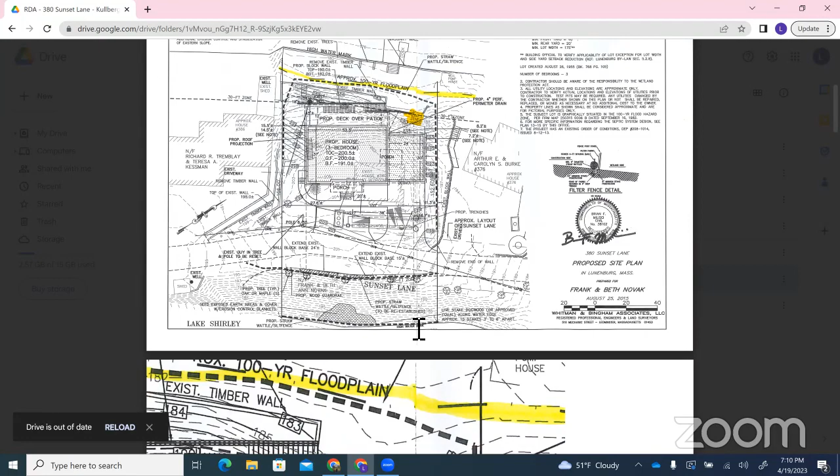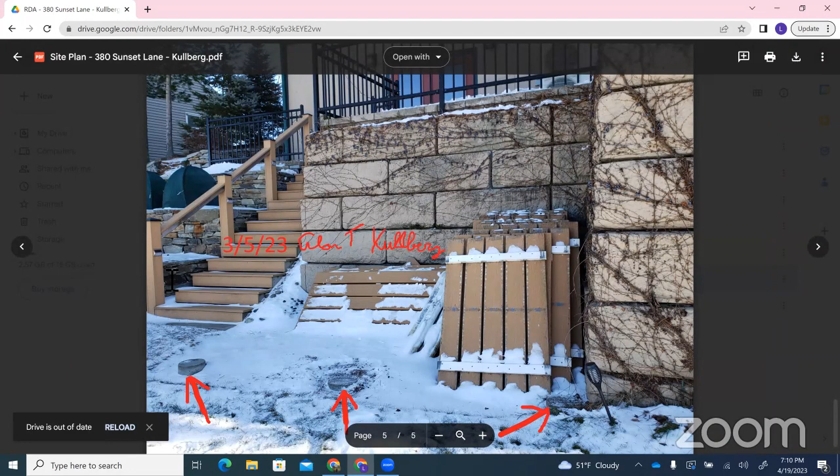And here is with those plans where that shed would be, 6 by 11, and it kind of fits in where that is cut out of the patio. I'm just gonna scroll and show the pictures that were provided. We also have more pictures on the drive that I posted, but this was with the submission. There's the posts that were originally there. And where we visited, the snow's gone, and that's always been mulched and maintained, and the posts are there too. Yeah, those are the existing footings that were there when we moved in.

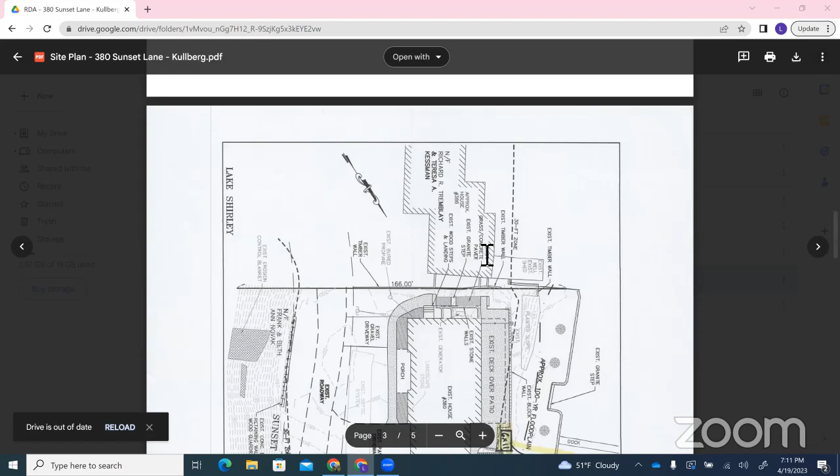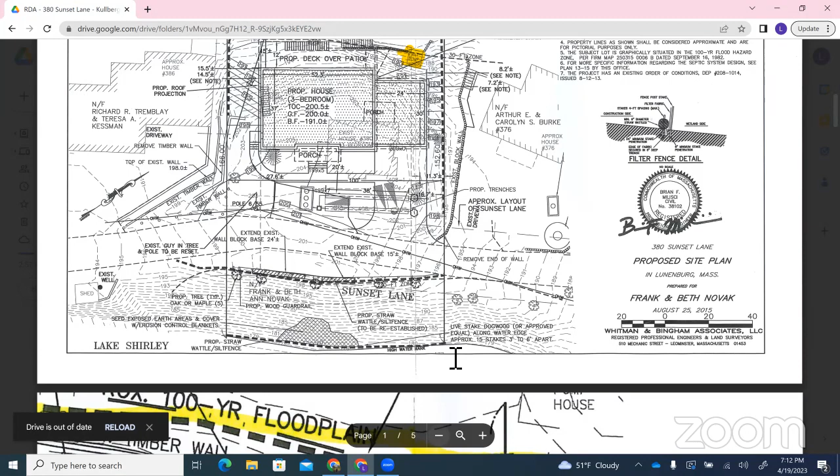So what size was the existing shed, Alan? Yeah, the pump house, I don't have dimensions on it. I never did. There's the size that's shown on this plan. And the only other thing I didn't see was the 50-foot no structure zone, because it looks like at least that shed was over the 30. Yeah, one attachment shows that one corner of the shed would be 23 feet 3 inches from the waterfront, measured by tape measure by me. Okay, the new shed would be? Yes, right there. That shows it there.

So we don't have the 50-foot no structure setback on the plan? Correct, I don't show that. All right, so this whole shed is within the 30-foot and clearly within the 50-foot. Yes. Okay, thank you. Anything else, Rich? No, I'm good for now. All right, any other comments or questions from commissioners? Any comments or questions from members of the public?

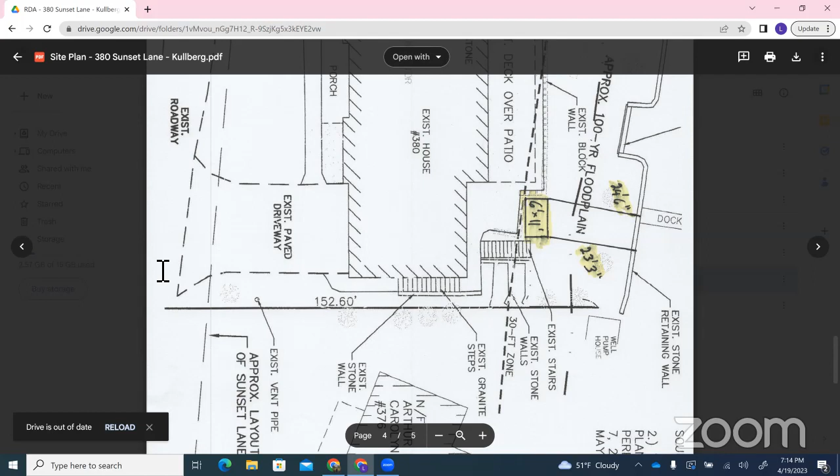Mr. Chairman, can you hear me? I can. I'm very familiar with this project. I've lived in Lake Shirley for about 36 years, and I'm speaking as an abutter now because it is my neighbor. I just want to say that I fully endorse the project. I understand what it's all about, and I think it's a real good idea. Good for the lake and good for them as well. Okay. Thank you.

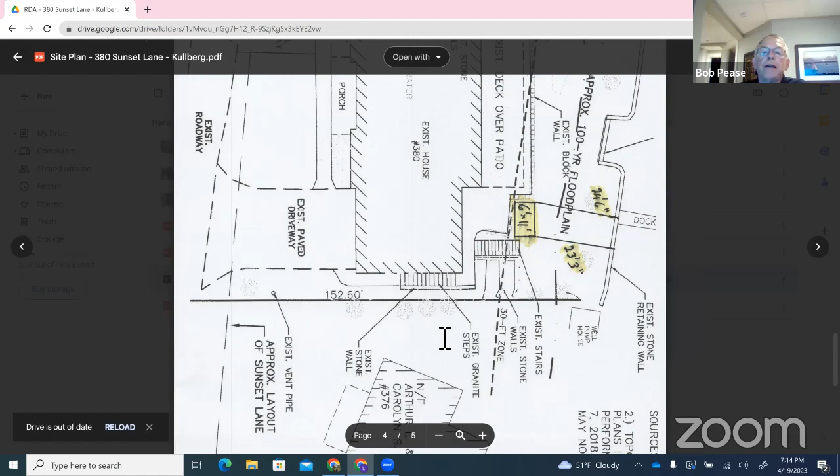I'm looking at the diagram here, and it shows it's 6 feet by 11 feet. And Anna showed a picture before of what looked like maybe the tops of some sonotube footings. Oh yeah, right there. I see. There's 3 of them. And is the dimension across those 3 footings 11 feet?

There's 3 more footings. Yes, the dimension across the front of those is approximately 11 feet. And then there's 3 more footings along the back wall there, like where my signature is on that wall. But I took those pictures in the winter, and so I couldn't get to those.

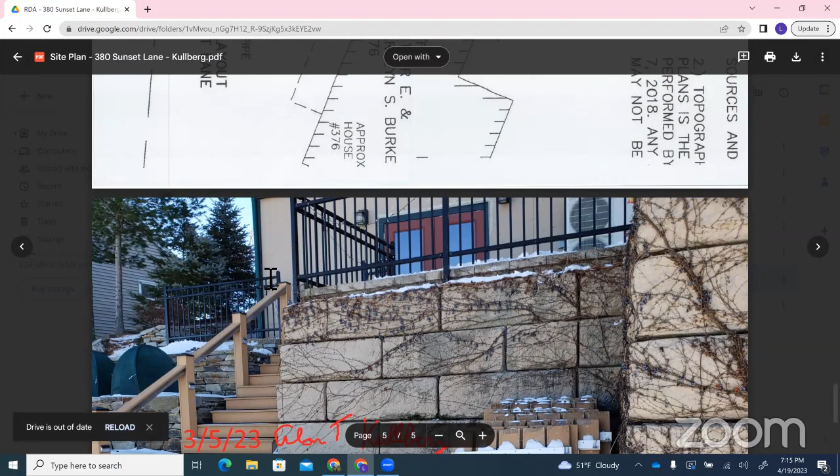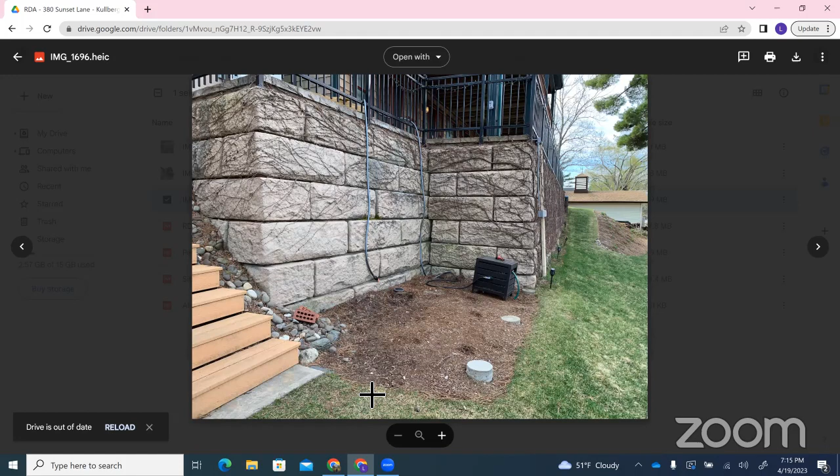But when Anna and Mary Wilson visited last Saturday, they could see 2 of the other footings. One of the footings is buried under some stones right there, right next to the stairs. So I've not dug that out, but it is under there. And so, Alan, in your opinion, or to your knowledge, is the distance from the front footing to the back footing about 6 feet? Or a little more? Yeah, I think it's slightly more, because I want to have a little gap between the wall and the back of the shed for air flow.

I see. All right, well, to me, that's great. The existence of the footings is good evidence of a pre-existing shed there. Because, in my opinion, without the pre-existing shed, this application would be dead in the water. But that's just my opinion as one member. Thank you very much. Any other comments or questions from commissioners?

Mr. Chairman, this is Mary. Yes, go ahead, Mary. If I may. So these footings look relatively, new is not the right word, because I don't believe that the current residents put them in, but they don't look like they've been used. And the arrangement of these footings doesn't align with the former pump house position, I don't believe, from my read on the engineered drawings. As an engineer, my read on those engineered drawings.

So Mary, as a person who did the site visit, what's your interpretation of these footings? They look like they were placed there by a former owner of the property in anticipation of putting a shed there that maybe never materialized. That's what it looks like. And from the measurements of where these footings exist now versus where the drawing shows the former pump house being positioned? Yeah, that seems to align with what the drawings say as well. Okay, all right, thank you, Mary, for that clarification and for setting me straight on what these footings represent.

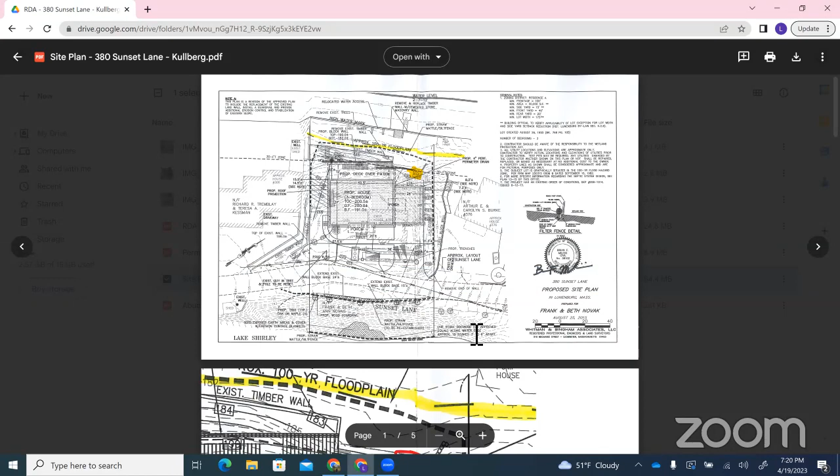Mr. Chair? Actually, I think it was on the other side of the 30-foot, Bob. I don't think it was on the lake side of the 30-foot. That's my interpretation, looking from plan to plan, of the drawing as well. All right. I should keep my mouth shut. I can't say anything right tonight.

Yeah, so, Mr. Chair, this is Alan. Yep, go ahead. Hi, yeah, so by this drawing here, you can see the existing pump house there that's highlighted in yellow. That's a little closer than the corner where we want to put in the shed.

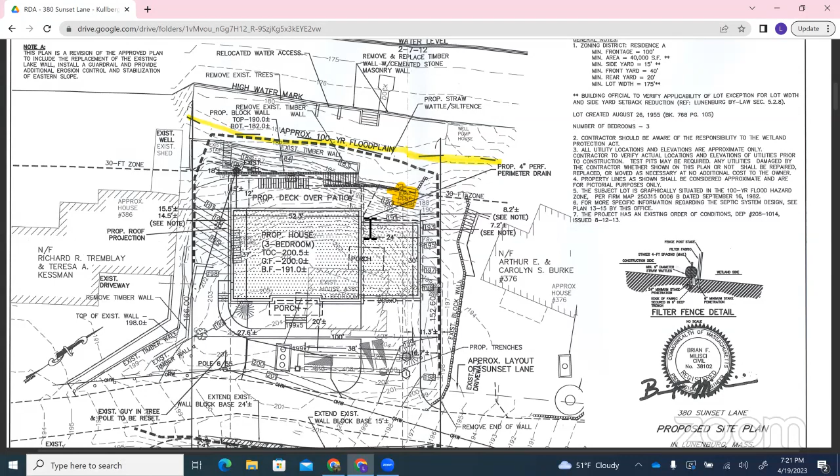But it also looks like it's a good deal smaller than, if that's a scale drawing. Yeah, although maybe that's not a scale drawing. 24 by 30. So if that's 24 across, well, it certainly is an 11. Yeah, I think you are correct that pump house is a little smaller than the shed we're proposing.

All right. So, right now we have a motion on the floor looking for a second. Do we have a second? If we have no second, then I'm gonna be looking for a different motion. We have to do something with this application. I'll second Rich's motion. This is Mary. All right, thank you, Mary. So we have a motion. Do we have further discussion now?

Obviously, there's a lot of angst about this, just given the waiting time here and the amount of silence. Is there further discussion about the motion to give a positive determination, which would mean that the shed couldn't be built? And I'm assuming, although he didn't say it, that Rich Tremblay will be recusing himself since he said he was speaking as an abutter. Yes, sir, I will be. All right, thank you. So that means it needs 3 votes to pass.

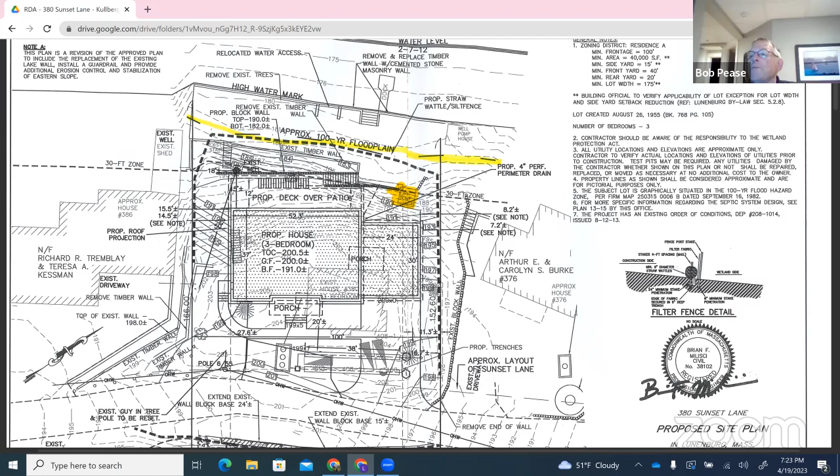On to our next public hearing. Pursuant to Mass General Law, Chapter 131, Section 40 as amended, and the Town of Lunenburg Wetlands Protection Municipal Bylaws, a public hearing on a notice of intent by Lunenburg Skate Park for the proposed construction of a skate park and drainage basin at 100 Chestnut Street. I see Greg Roy warming up his screen.

Can you all hear me? I can hear you just fine. Greg, am I right that there's still no DEP number? Correct. I just looked a few minutes ago. There is no DEP number, so I will give you an introduction here.

I'm hailing from the Outer Banks of North Carolina this evening. Congratulations, that's wonderful. That's exciting. I hope that my connection here stays solid. So the weather is indeed beautiful here. Excellent. Mr. Chair, could I share my screen? Would that be acceptable? Absolutely. Okay. Bear with me here. I'm running with one small monitor. Okay. Can you all see the screen? I can. Yep. Okay, great.

For the record, my name is Greg Roy with Dillis & Roy Civil Design Group, and I'm representing the Lunenburg Skate Park, Inc. this evening. With me today on the call, I think, is Anthony Caiozzo, who many of you probably know, he's the president of the Lunenburg Skate Park group. And I just wanted to spend about 5 minutes giving the commission a little bit of history as to where we've come with this project, and then I'll of course do the customary project introduction.

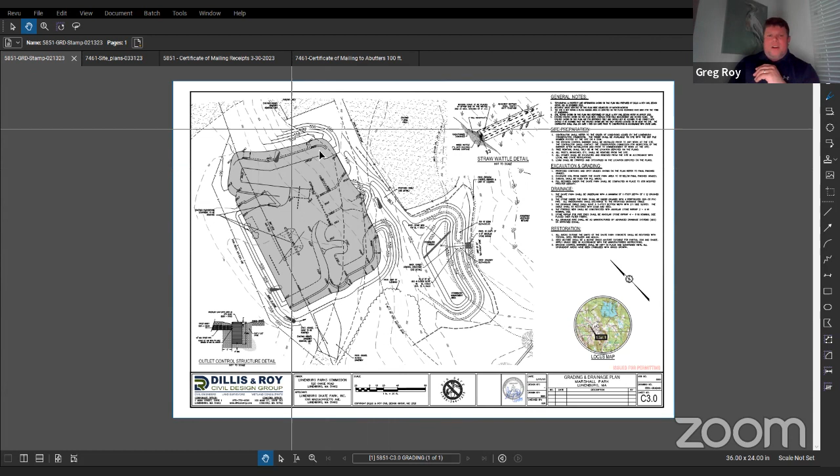So if you can see my cursor here, this line right here is the limit of the T-ball fence. Off the page, up in this area here, is the parking area, and then further up it would be the outfield fence of the softball field, just to give everybody a bearing. And I hope that puts context in this, because I'm realizing now I don't have an overall park plan to share with you.

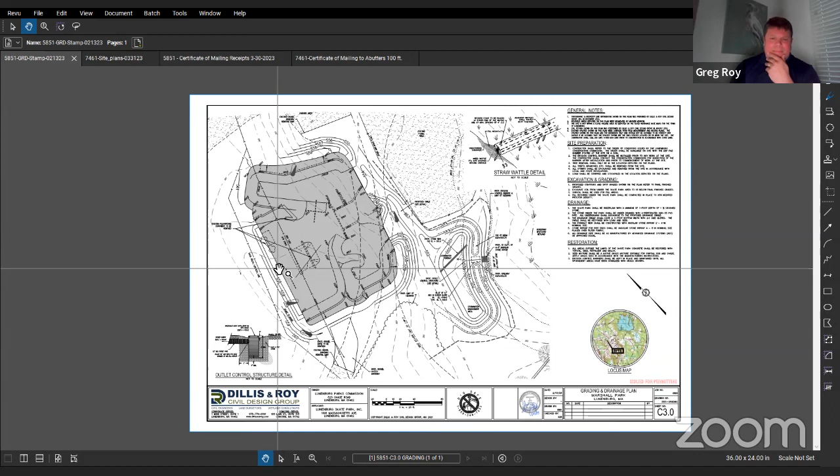But the solid gray hatched area is the limits of the concrete skate park that we would be constructing. The footprint of that is 8,500 square feet. And I think the overall dimensions are approximately, I can't even remember, I think it's 75 feet by 120 feet or something nominally like that, to put that in perspective for you.

There is a wetland system down in the woods, which you can see here with these wetland flags. It's not hatched in, but it's right down in this area here. And so there's an associated 30-foot no-touch zone, which is right at this dotted line here, right on the edge of our proposed limit of work. The corresponding 50-foot no-build zone is this dashed line here. And then the 100-foot buffer zone is this heavier dashed line. So most of the park, with the exception of a very small corner of it, is completely outside of the buffer zone.

This project, of course, will be creating new impervious area, and is not a residential project that would be afforded an exemption under the Massachusetts Wetland Protection Act from the Stormwater Management Guidelines. So we have designed a stormwater management area to comply with the Massachusetts stormwater management policies. We have designed a swale system here between the skate park and the T-ball field that will collect the runoff from the skate park.

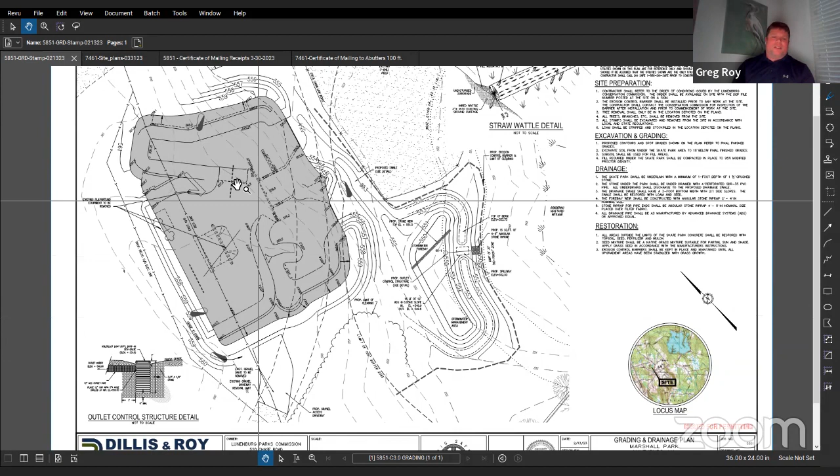From a grading standpoint, it's very difficult for you to see on this two-dimensional plan, but if you can all imagine a skate park, it has ramps. So this feature in here is a sort of ramp where this section is about 4 feet lower than the upper portions here. And this slopes down towards an open end on this side.

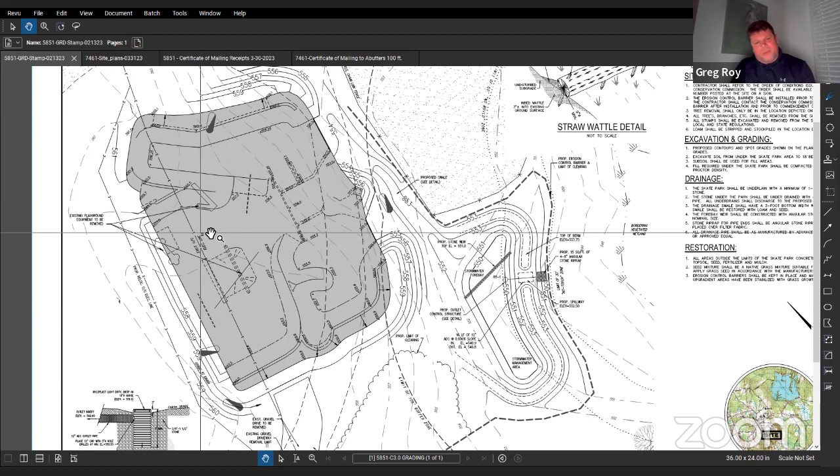Same thing here. We have some flat areas, but they all slope down, and everything ultimately drains from this high point on the left side of the plan down to the right towards the T-ball field. And we designed it that way intentionally because that's where the existing grades work on the site, and it made the drainage work in the skate park, so that we don't have any standing water anywhere in the skate park. Very important.

I did not get them on this plan. I know that I'm going to owe you this. I did send a survey crew out after we submitted this, after my site walk with Anna, which was about a week and a half ago, I think, or 2 weeks ago. We did locate the trees within the stormwater area, particularly the trees that are within the 50-foot no touch zone.

Between 30 and 50 feet, there are 4 trees that will need to be removed. If my memory serves me correctly, there's 1 pine and 3 hardwoods. I think they're oaks. All of the oak trees in that area are in the 12-inch range. So we're not talking about enormous trees, but there are a few trees there. I know that you can't close the meeting this evening because we don't have a DEP number, but next time I do intend to have those on a plan with some mitigation for those as well. So I did want to bring that to your attention.

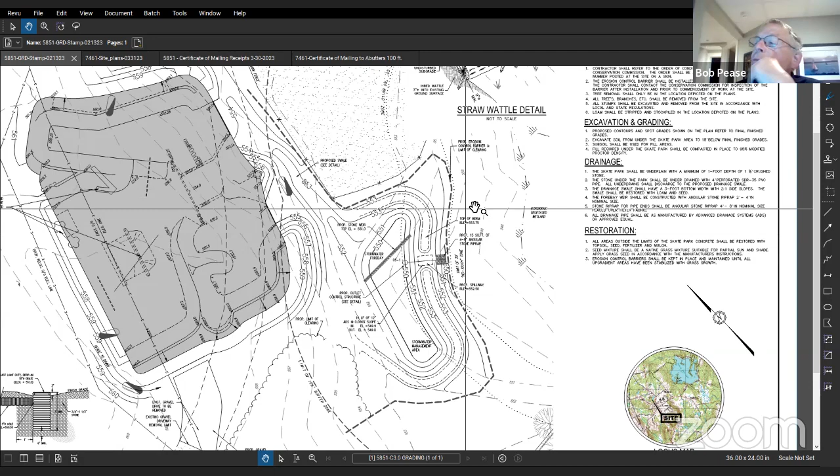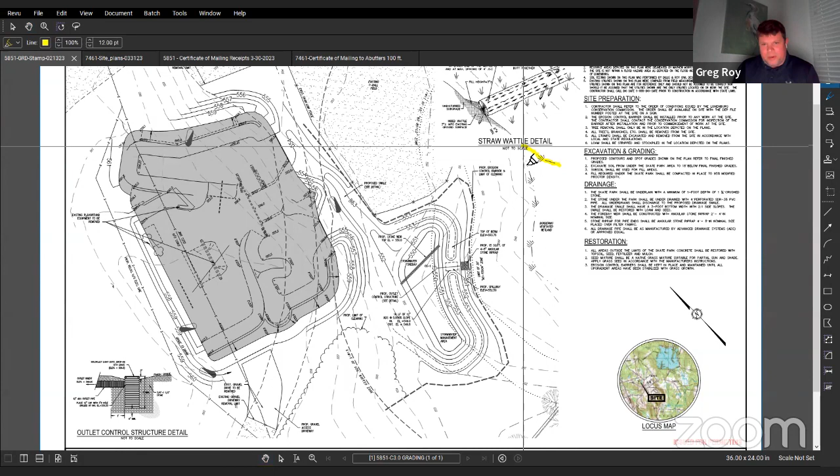Mr. Chairman, if I have a question. Go on ahead. I may have lost track, Greg, and I apologize if I did, but somewhere in the woods there appears to be a wetland. This weekend when Anna and I went out, there was a depression and it was filled with water. Yeah. Oh, and it's where your cursor is. I see that. Let me highlight it for you. Sorry about that. I ordinarily would mark up a plan, but this is the wet area down here. Okay. Very good. Thank you. Yep.

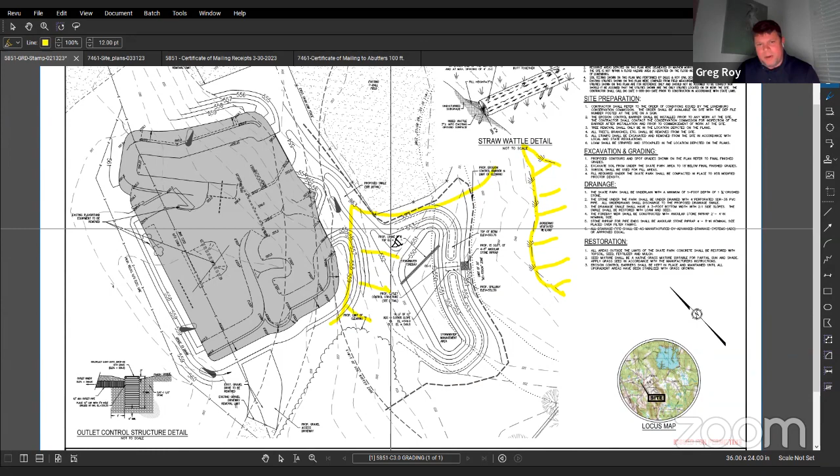And Greg, could you highlight the area where you're saying you're going to take down trees? Yeah, sure. So there are trees, and I'm going to show them to you within the 100-foot buffer zone. I'm going to circle this. The whole area is wooded, really. All in here is wooded, okay? I'm going to show you all the trees within this location on an updated plan, but the 4 trees that are within the 50 are located right in this area here.

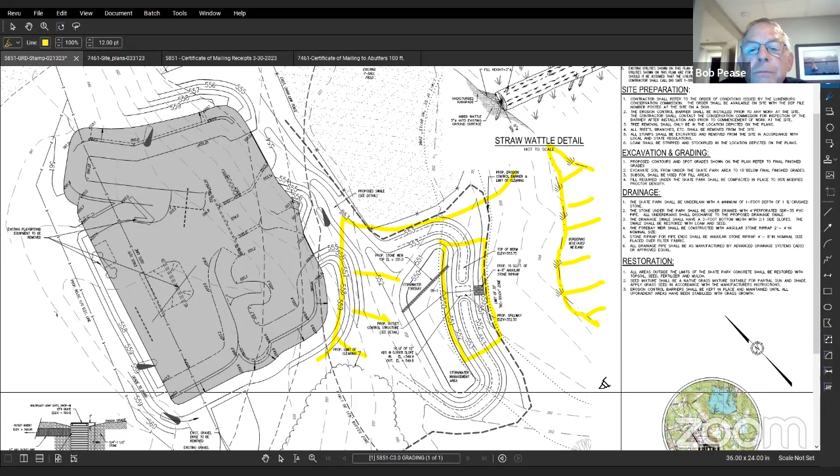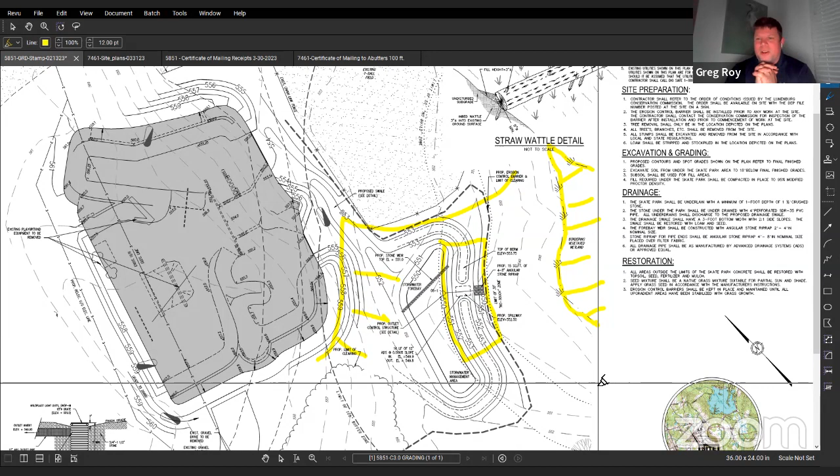Speaking as one member of the commission, our present rules say you need to replicate trees taken down within the 30-foot no disturb. It doesn't talk about the 50. Okay. We would love not to do any replication. We're obviously trying to devote as many dollars as we can to the construction of the park, but we certainly understand that we have to comply with your regs. So I guess I was under the impression that it was within the 50 foot. No, it may be within the 30. Okay, well, we're not doing any trees within the 30. No touch within the 30, so we're in good shape there. Other questions or comments from members of the commission?

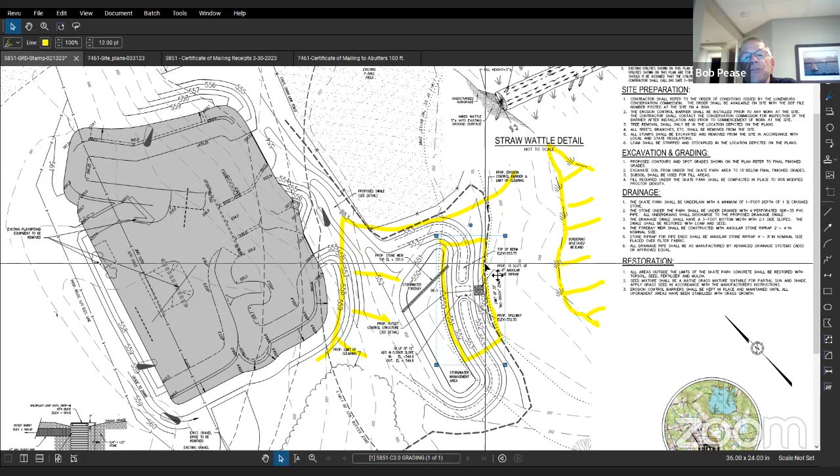Mr. Chairman, if I may. Go right ahead, Mary. I'm sorry if I interrupted you before. I thought the replication was a mandate within the 30, but was discretionary outside of the 30 within the 100. We can ask for replication anywhere, I believe. But there's nothing in our regulations that talks about replication outside of the 30. Fair enough. That's my interpretation. Richard was the author of that, if he wants to weigh in here, by all means, but that's my understanding.

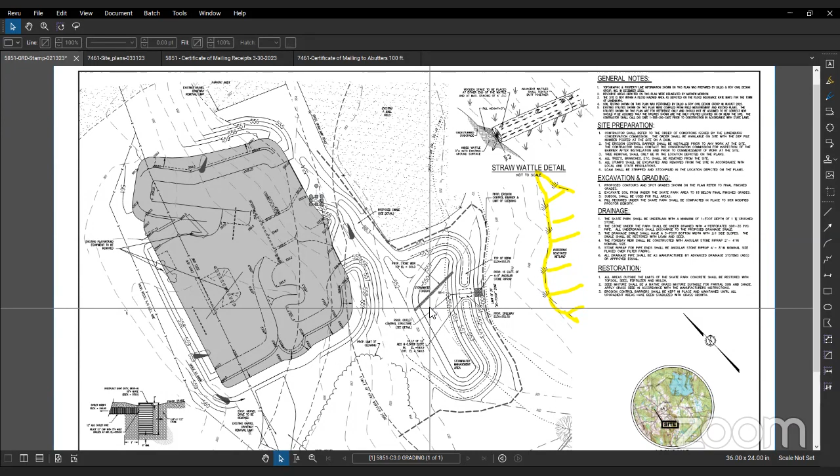Yeah, the regulations are under the bylaw, and 30 foot is a mandate. Anything outside of the 30 foot is at our discretion, as we feel that it should be replicated if need be. Thank you, Mr. Chairman. Thank you, Rich. Other comments or questions from members of the commission? Richard?

Thank you, Mr. Chairman. Greg, how many trees in all do you estimate that you'll be taking down in that area? Boy, it'd be a guess at this point, Richard, but I think it's probably in the 15 range. I have them on a plan. Let me see if this works. 1 second. I hesitate doing this only because I'm not sure how it'll show, but let me see if this will work. Bear with me. So you can see here, we located a ton of them.

I'm still looking at the same screen, Greg. Oh, can you see the screen that has all the trees on it now? Nope, we're still looking at the same plan that we've been looking at for the last 15 minutes. Oh, okay. 1 second, then I have to switch. I am not used to sharing with only one monitor. How about now? Can you see a plan now?

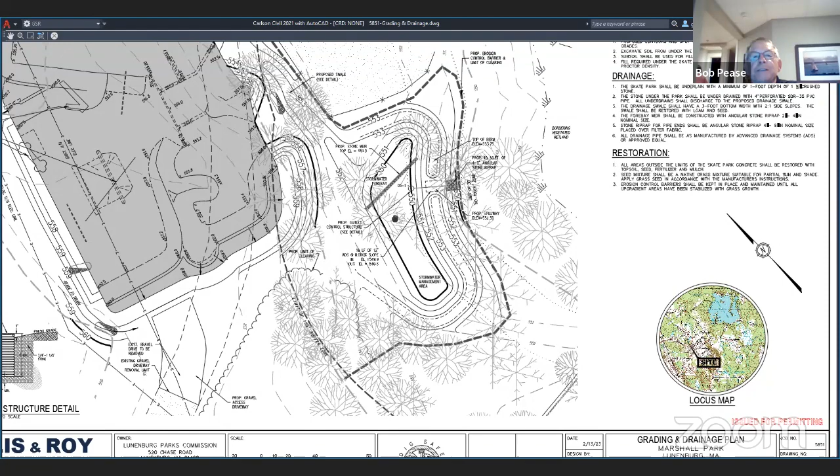Okay. So this is a raw. I haven't vetted this yet or cleaned up the plan. This happened while I was on vacation, but I sent the survey crew out to locate the trees. I can't draw on this unfortunately, but this entire clump of trees down here and this one will be saved.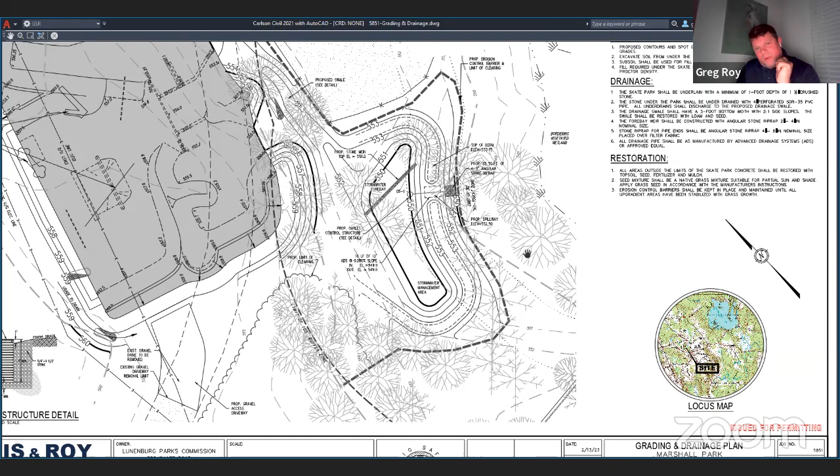Okay, so all of these trees down here are not coming out. All of these trees over here are not coming out. All the trees in the 30 foot are not coming out. This pine tree will be saved. It gets a little muddled, that's why I have to clean this up.

But there is this oak tree right here. There's another oak tree right here that has to come out. There's a pine tree right here. There's a pine tree right here. And then there's 2 oak trees here, right in this location. So I think that's 4, 5, 6.

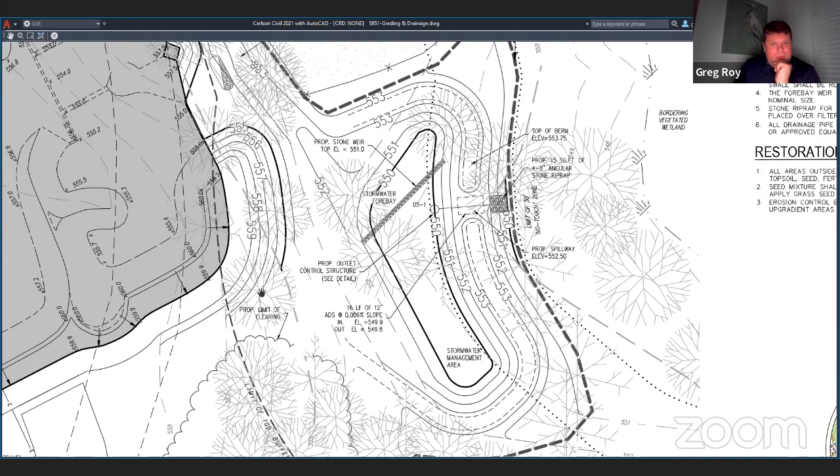This one I think we can save. 7, 8, 9, I think 10, 11, 12, 13, yeah. I'm in the 13 to 15 range. Most of them are right on the edge of the buffer zone. A lot of them are kind of on the outer limits of the buffer zone.

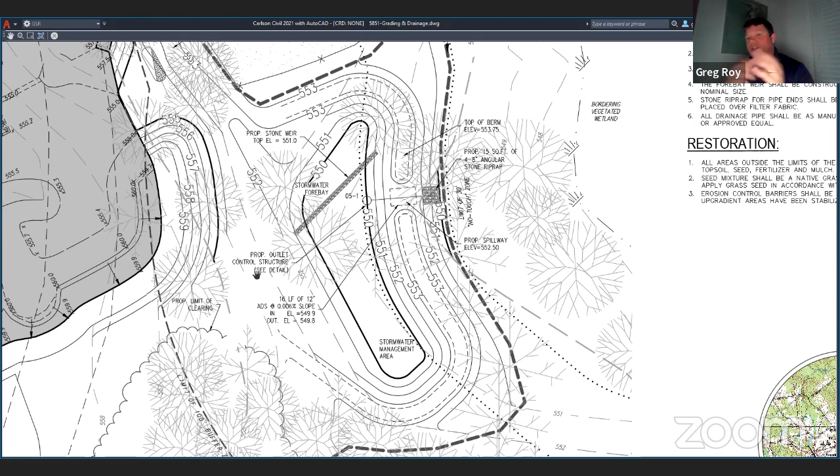There's actually not many trees. If you walk out there, where we're proposing the basin is actually kind of a clear area. I mean, there's a few trees, but it's not the densest part of the forest. If you can see here, we're not going in an area like this and putting the detention basin, as happenstance occurs. So it actually worked out fairly well from a tree removal standpoint, but there certainly are a few that we have to remove.

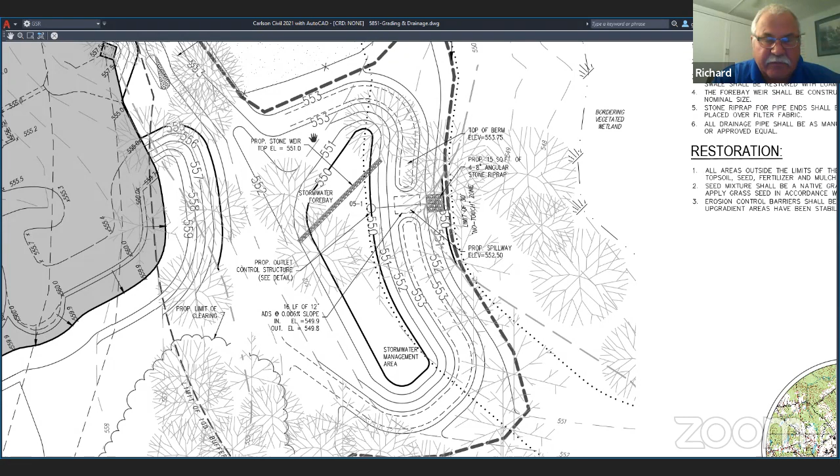Well, Greg, in your opinion, would it be feasible with the design of this park to replace even a few of those trees? Yeah, I mean, we can replace a few trees for sure. It's a little tricky because we'd like to put them away from the skate park if we can, because leaves and skate parks aren't great. Not that we're not going to have trees around it, but we'd love to put them deeper into the buffer zone, if you will, where we can fit those. But I think we could definitely put a couple in.

All right, thank you, Mr. Chairman. Thank you. Any other comments? We're definitely going to have to continue this since we don't have a DEP number. So other than the placement of the trees, is there anything else we're going to be asking Greg to do between now and the next meeting? Are there any other comments tonight? If there are no other comments, then I'd like to look for a motion to continue until May 3rd.

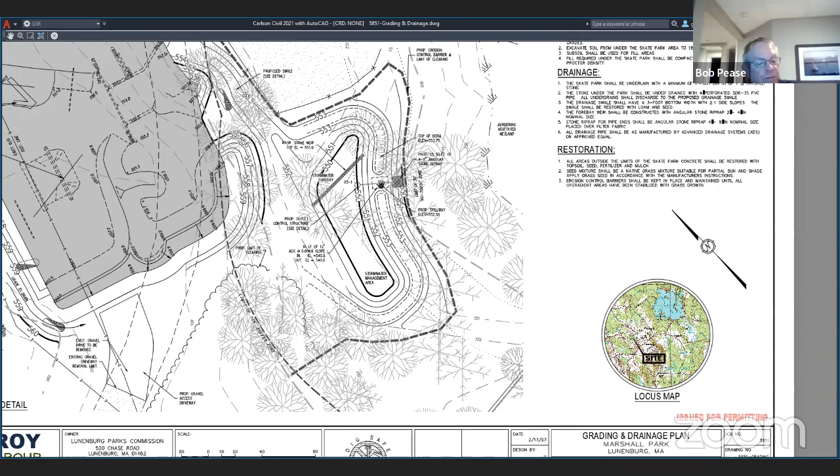So moved. Second. Motion and second, roll call. Rich, aye. Mike, aye. Mary, aye. Richard, aye. And aye for myself. Thank you, Greg. Okay, thank you. And thank you for sharing the screen. I'm on next too, but I got to turn my light on in the room here, so bear with me.

Okay. Pursuant to Mass General Law, Chapter 131, Section 40 as amended, the Town of Lunenburg Wetlands Protection and Municipal Bylaws. A public hearing on a notice of intent by Robert Shapiro for the proposed construction of a parking lot and relocation of an existing playground at 39 Main Street. And it's my understanding that also does not yet have a DEP number. So we'll be discussing this tonight and looking to see what further information we need before the next meeting, and then continuing it.

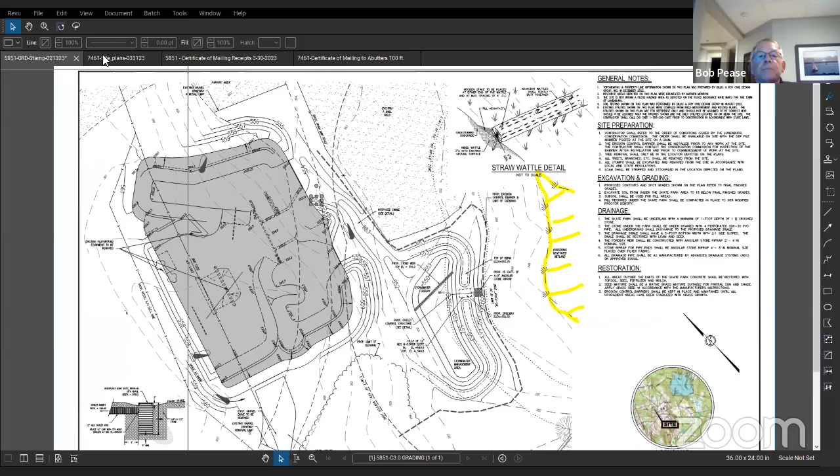So who is here tonight for the Shapiro's application? Mr. Chair, Greg Roy, Dillis and Roy, I am here representing Rob Shapiro this evening. Rob is also on the call. So again, with your permission, I will share my screen. Super. Okay. Can you all see that plan? I can. It's a little small, but I can see it. Yeah, I'm gonna zoom in for you. Bear with me here.

So as you mentioned, we're here this evening for the property at 39 Main Street. This is the building formerly owned by the church. I think we're all probably fairly familiar with that. Maybe have visited the building for a function or two over the years. Rob Shapiro has purchased the property for the purpose of using it for his business, which I'm going to call a school.

And Rob, please feel free to chime in here and correct me if I'm wrong. But Rob has a business that works with children on the autism scale and things like that, and so has been looking for a permanent place for a number of years now, and this property really fits the bill for him. So he has purchased the property and intends to convert it into a building that would be used for that purpose.

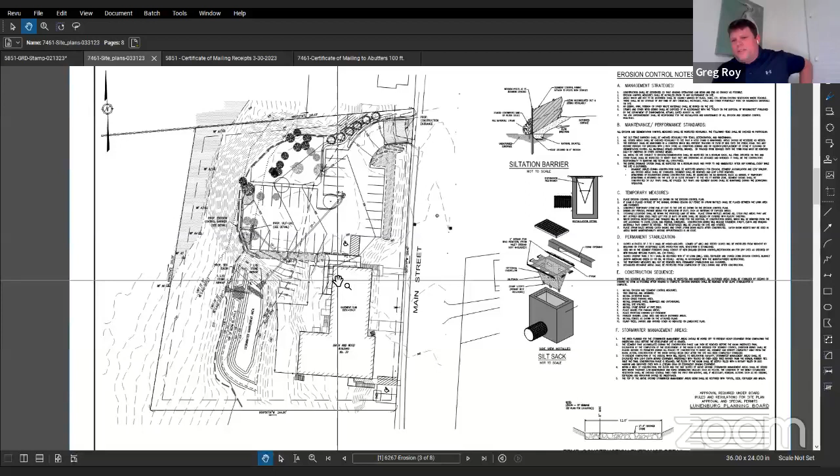There's a lot of interior things that he'll be doing from an architectural standpoint, but from an exterior standpoint, the biggest thing that is required for this site is, of course, parking. And so his program will involve a day program with approximately 30 children, with approximately 30 staff to support that. So we've filed concurrently with the planning board for site plan approval on this one, which will be open next Monday.

But of course, we've designed the number of parking spaces and the layout in accordance with the town's parking bylaw in the zoning bylaw. And I think we have a total of 33 spaces on the site. If you can visualize the site to the north of the existing building, this is on the west side of Main Street. There's a low area that you can see from the street if you walk down there past the building on the sidewalk, or you're driving by, and that's the area we're proposing to utilize for a parking area.

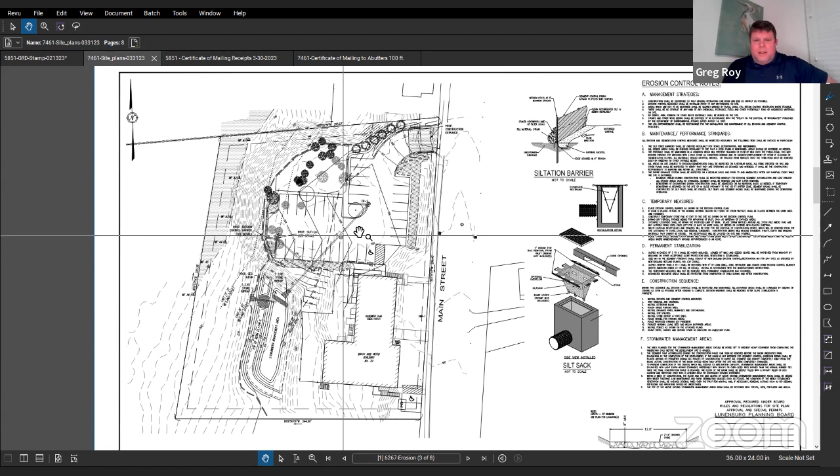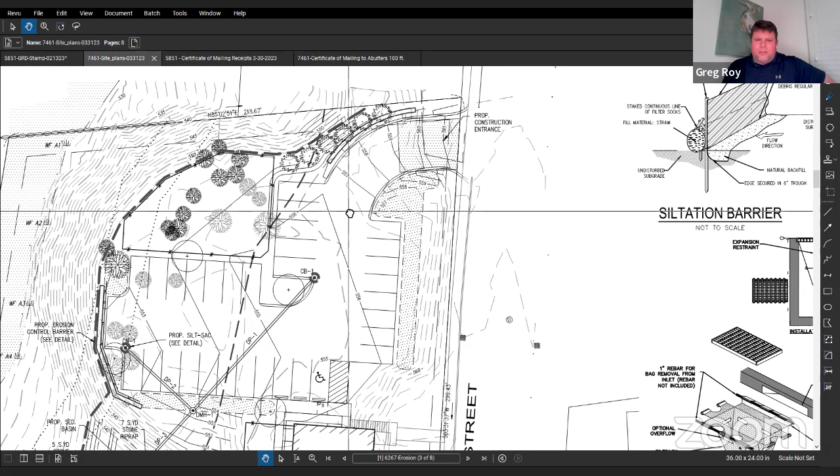There's also an existing curb cut, and more or less a ramp that can be used even today to get down into this area with a vehicle, and that's the part of the site that lends itself naturally to a driveway. So we're proposing the driveway access in that location, and then the parking area would be this L-shaped area here. The wetland system is located at the back of the site, and it is the same wetland system that would be bordering on Marshall Pond, if you can visualize that.

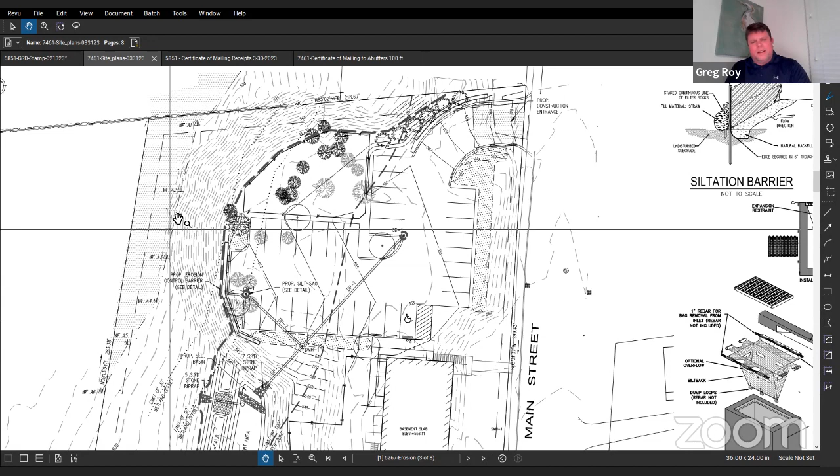So there's a rather broad wetland area that exists between this site and the edge of Marshall Pond, and this is the limit of it right here. It's at the bottom of a very significant slope that you can see here on the plan. This first dotted line here is the limit of the 30-foot no disturb zone. Sorry, I'm zooming out a lot, I'm not used to this monitor. This second dotted line is the limit of the 50-foot no build zone.

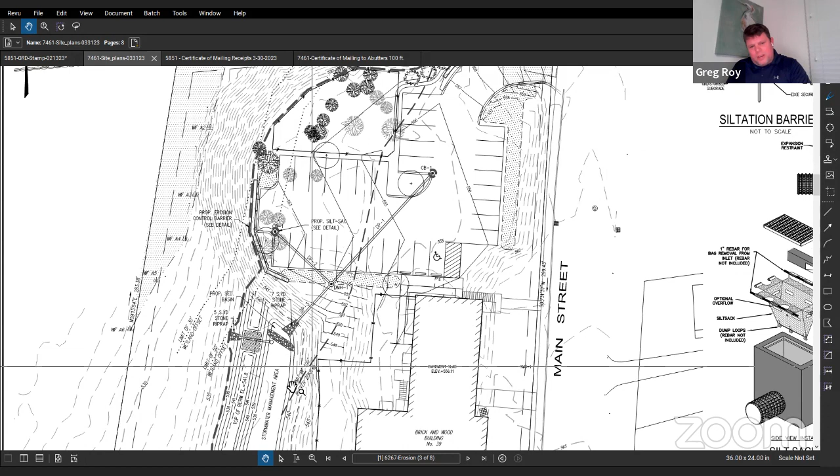And then this heavy dashed line in this location is the limit of the 100-foot buffer zone. So you can see that there is no work proposed within the 30-foot. There is some work proposed between 30 and 50 feet. And about half of the parking lot is within the 100-foot buffer zone, and a little bit more than half of the stormwater area is also within the buffer zone. So this project is a commercial project as defined by the Wetlands Protection Act, and again, is not afforded any exemption from stormwater management regulations.

So we have designed a stormwater management area that will infiltrate and manage the stormwater runoff from the impervious areas on the site. That will include both the new parking lot areas, as well as the existing impervious areas from the roof of the building. The location where we're proposing the stormwater management area is on an existing plateau behind the building. It actually works fairly well from a grading standpoint. We were able to keep most of the basin 50 feet from the edge of the wetland. All of the infiltration within the basin would be greater than 50 feet from the wetland edge, as is required by the stormwater management regulations for infiltration areas.

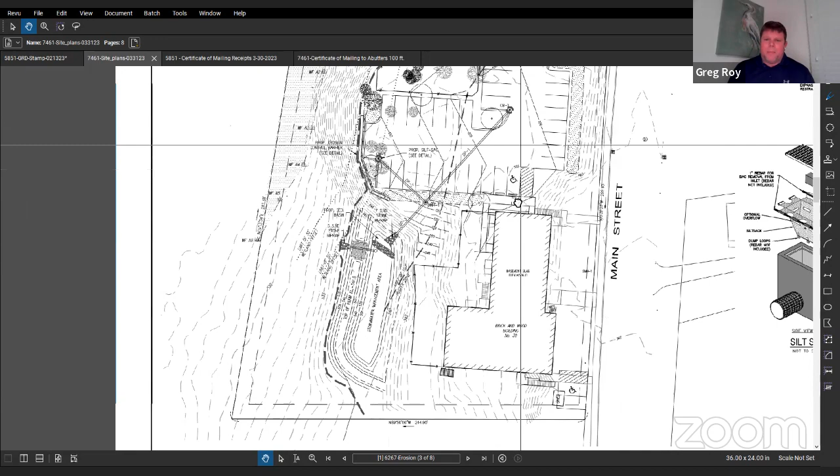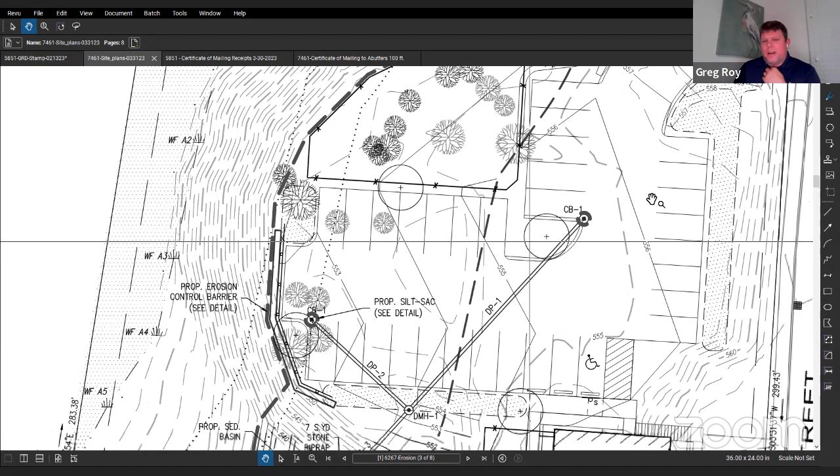We are proposing to take down a few trees. I'm noticing now that this is a little bit difficult to see, but these trees here, they're not labeled on this plan. I apologize for that, but we have 10 trees proposed to be taken within the buffer zone. We're trying to save as many as we can. There's quite a few trees over in this area that we'll be saving, and the entire slope is vegetated. We didn't capture those on the plan, but this is a heavily vegetated slope. We will be planting new trees scattered around the parking lot area associated with this application as well.

I think I'll leave it at that. As you mentioned, Mr. Chair, there is no DEP file number associated with this project yet. So we do know that you would have to continue this. We understand that, but we are certainly interested in hearing any comments or questions that the commission may have. And I will turn it back over to you.

Thank you. I have one initial question. You're showing that you're going to put what looks like a turnaround area in half of one parking spot within the 50-foot no structure there. Would I be correct in assuming you could point the commission to some regulation which requires you to have every single one of those parking spots? Some zoning regulation, or they're required?

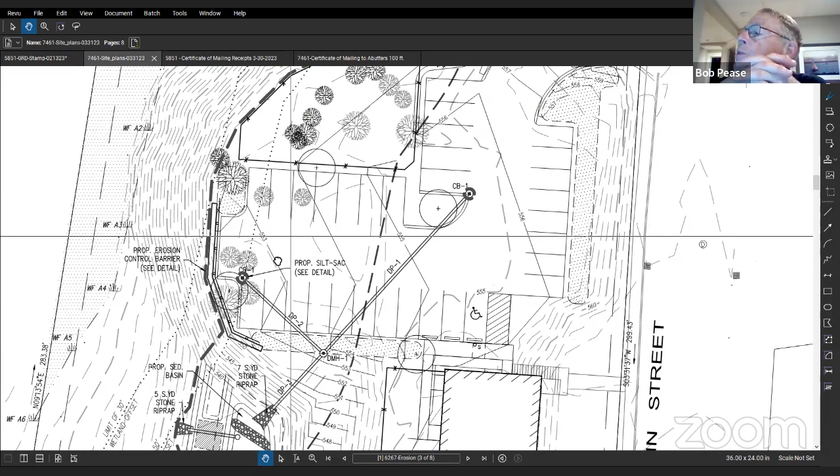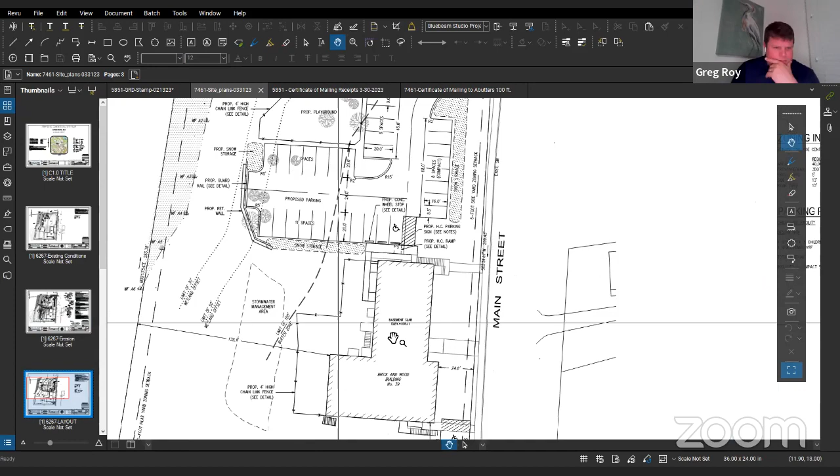Yeah, so I'm just using the erosion control plan here, but as part of your package, you have the entire set that we submitted also to the planning board. And sheet C3 has the parking requirements here, so you can see our program. We have 30 children, 27 employees. Mr. Shapiro would actually like to have 30 employees. So we're actually a little bit light in parking here, so we're really trying to get as much parking as we can on the site. That's his program, 30 to service 30 children.

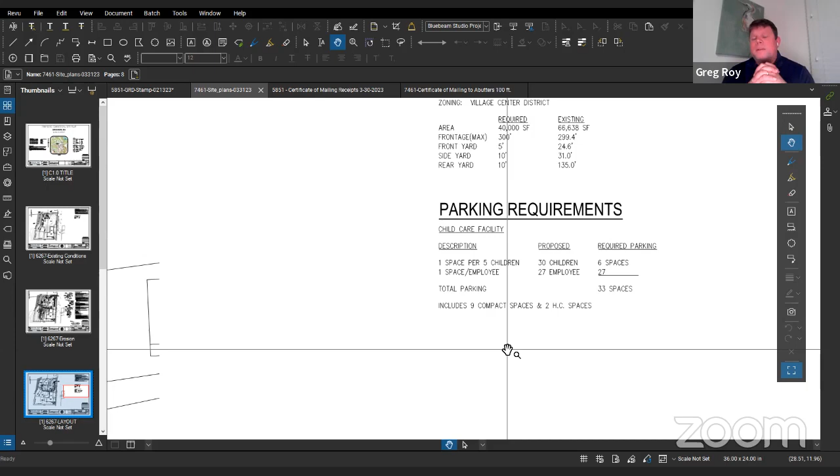And so you can see there those are the parking requirements from the town zoning bylaw for each of those. You need 1 space per 5 children, and you need 1 space per employee. Thank you. That's exactly the information I was looking for, because I'm sure that will come up in just a moment. Sure. All right, thank you. Any comments or questions from members of the commission?

Mr. Chairman, I have a question. This is Mary. Go ahead, Mary. In the stormwater management area, are there any trees in that area or in that embankment? There aren't any shown on your drawing, so that's why I was asking. Yeah, no, I appreciate that. I'm going to say no, Mary, but with the caveat that I will verify that. And if there are any, I'll put them on the plan, and I will confirm at the next meeting.

This entire area in the back is really disturbed. So it's very shrubby. I'm not sure of the type of shrubs. There's probably a lot of invasives, to be quite honest with you. There was a lot of oriental bittersweet back there. That I noticed, and there's probably multiflora rose. There's definitely greenbrier. It's that kind of area. This flatter part of the slope in here does not have a lot of overstory. But I will verify that, and if there are any overstory trees there, I will put them on the plan. Thank you, Greg.

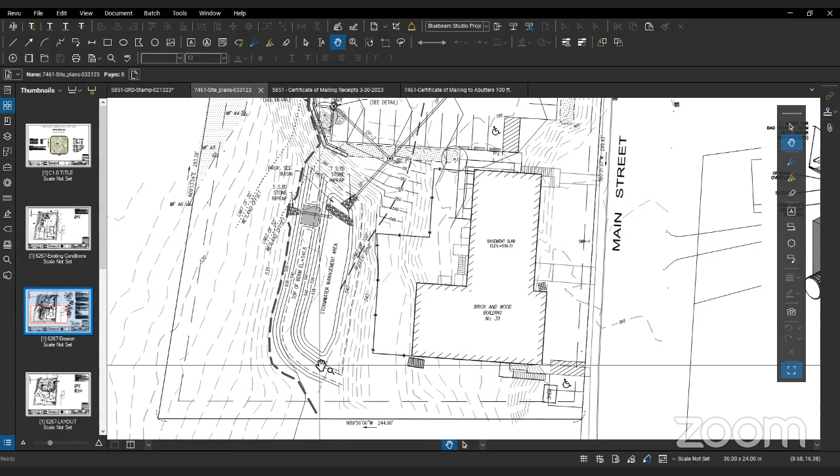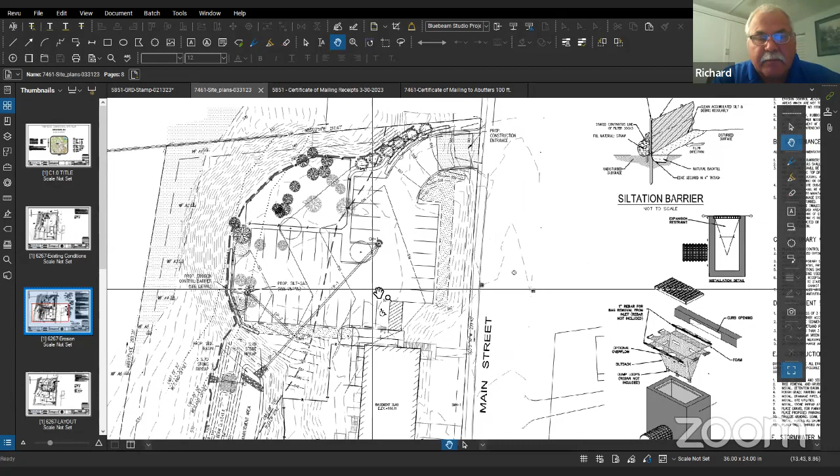Thank you, Mr. Chairman. Greg, I would suggest that you clearly identify, before the next meeting, which trees will be removed, any trees that'll be preserved, and any new trees that you're already planning on adding. No problem. Thank you. Any other comments or questions from members of the commission? Richard? Thank you, Mr. Chairman. Greg, just a quick question. In this parking lot area over here, are there any plans to change the grade at all?

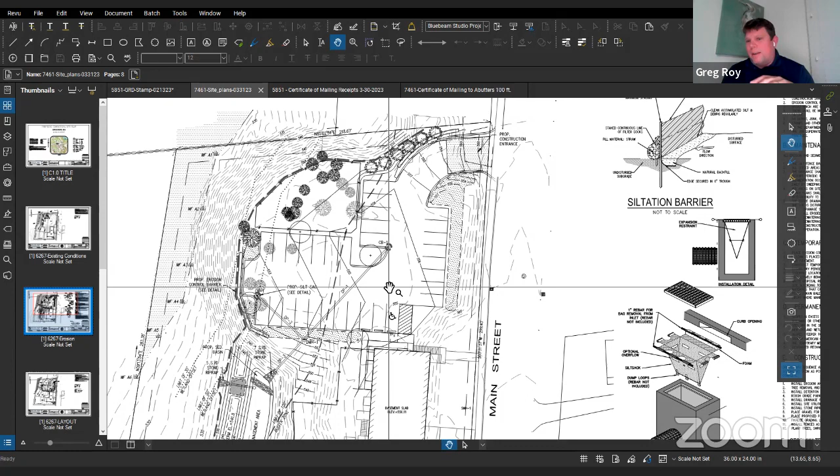Great question. Thanks, Rich. Yes, we will be slightly. We're trying to work as much as we can with the existing grades, so we don't have to bring in a lot of fill or take a lot of fill off the site. There will be some fill required to be brought in, which is normal because we'll need to bring base material in for gravel and things underneath the asphalt. For example, these solid lines here are the proposed contours, and the dashed lines, in more of a grayscale, are the existing contours.

So in this area here, we have a proposed elevation of 556 over an existing contour of 555, so there'd be about a 1 foot fill. As you move down the site, it's very similar. Here we have a proposed 555 over a 554 roughly, so it's about a foot. Down here it's about the same, and that's because we can only slope this parking lot so much before you have too much cross slope with cars parked. I think we gave a 5% slope, which is kind of the maximum limit we like to see before someone's door won't stay in one location. You have problems with doors hitting cars and things.

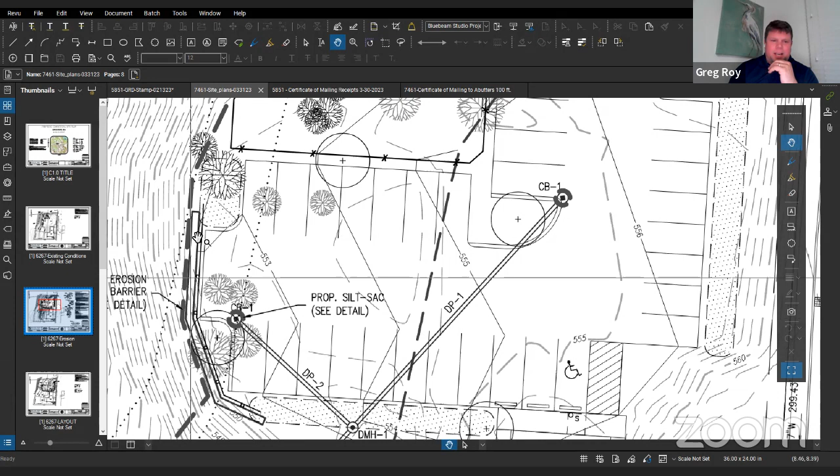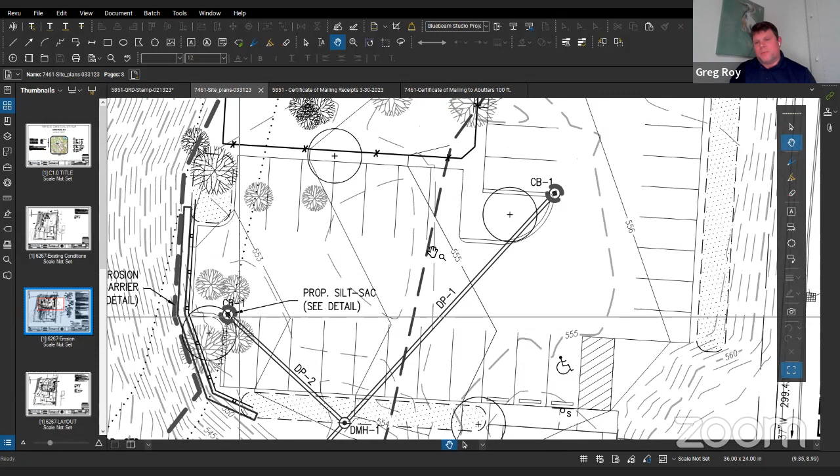So we are proposing a short retaining wall down here to sort of catch that grade right at the top of the slope. It's a few feet, I think, in height, just to make sure we can catch that. I do want to say that all the paved areas on the site will be graded back away from the slope and towards the two proposed deep sump hooded catch basins that'll be located in the parking areas, and then discharged into the stormwater management area.

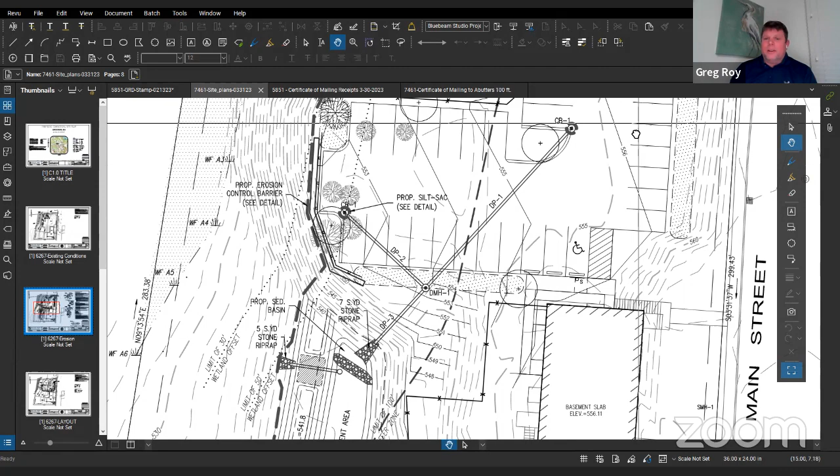So for all of the paved areas on the site, the stormwater will be managed. But no, the grading question is a good one, Rich. We tried to work as much as we could, but we could only slope this ramp so much, so we tried to get as low an elevation as we could, as fast as we could, to get down to the existing grade, but you can only get down so far. So there is about a foot of fill proposed in the flatter areas of the parking areas.

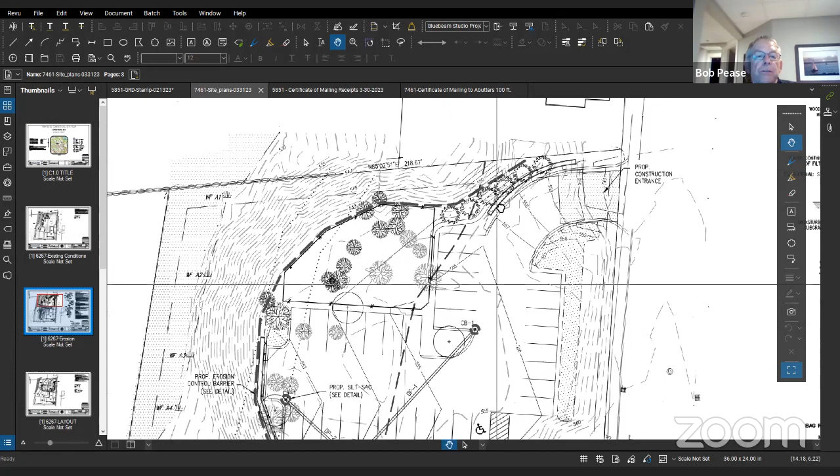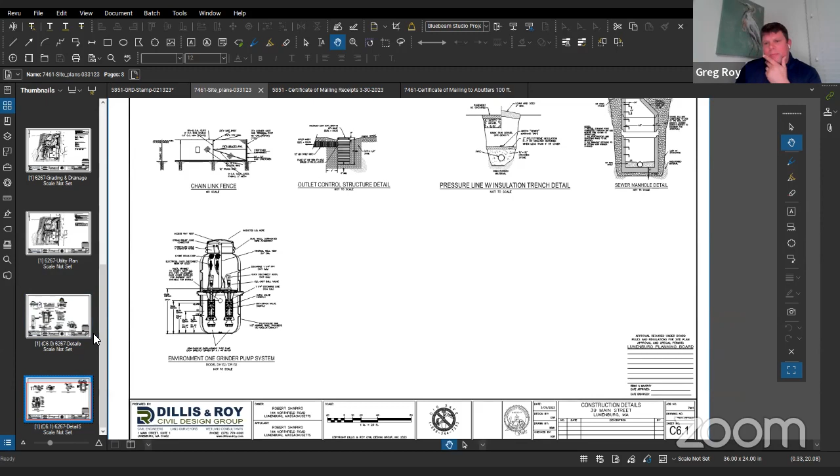Okay, thank you, Mr. Chairman. Thank you, Richard. Greg, is there a detail somewhere on the plan for that retaining wall? It's down there right at the edge of the 30 and the 50? That's a great question. I do not think there is, but I can certainly add one for you. That would be wonderful if you could add that before 2 weeks. Yeah, let me just take a quick look here. Yeah, I don't think I have one, so we can add that for you, no problem. Thank you. Any other comments or questions?

So what I remember hearing tonight was clarifying the trees to be removed and the trees to stay, making sure about the trees in the area of the detention pond, whether there are any or not, and putting a detail on that wall. Other than that, I don't remember anything else. Does anybody else have anything we're asking Greg to do between now and 2 weeks from now?

I will say, Mr. Chair, if I may. Yeah, go ahead. As I mentioned, we will be opening the planning board process on Monday night, and we expect to get comments from that process too. So we'll make sure the three comments you just mentioned, two relative to trees and one relative to the detail, are on the plan. But I wanted to make the commission aware that our intention would be to have you ultimately reviewing and hopefully approving a plan that is final with both your board and the planning board.

So my intention would be to incorporate not only the comments received from your board tonight, but also any comments we receive from the planning board on Monday night, and have a comprehensive set back before both your commission and the planning board, so that both boards are reviewing the same thing. I don't want to put an approval in the mouth of the commission, but assuming the commission feels comfortable approving this ultimately, we want to have one set of plans referenced in both decisions. It just makes it easier for the contractors. I wanted to make sure that you were aware. Thank you.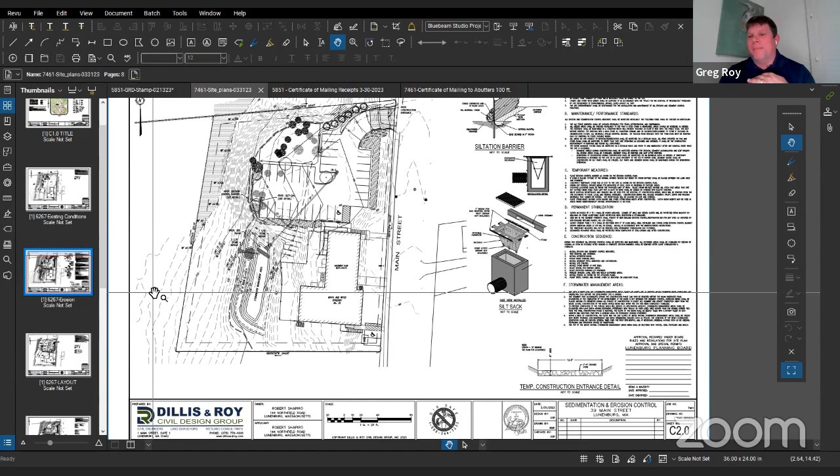Can you explain a little bit more about the silt sack? That looks like it could be a real pain in the neck to maintain. It's a pain in the neck to maintain, but it's the best way to do it. When we put these catch basins in, there is sometimes a short period of time, on this project a very short period, where we have the grates installed before we have pavement and a stabilized site. What's even more of a pain is having to get a vacuum truck or a jet truck to clean out your storm drains after you pave, because all kinds of silt has washed down through the catch basin.

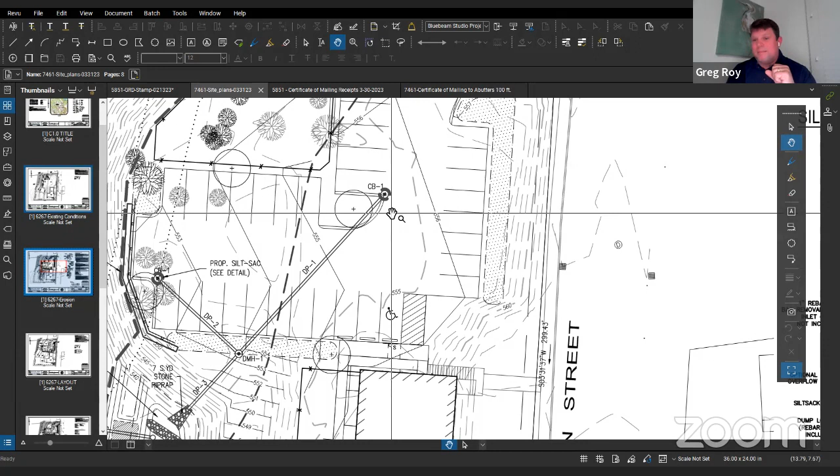So when those are installed at any point prior to paving, we have them put those silt sacks in there. And yeah, when you get a storm and they fill up, you have to pull the catch basin grate, pull the silt sack out and empty it. But it's a small price to pay, especially since there are only two on site, for keeping the storm drainage system that you've just spent thousands of dollars on clean. And that's why we do that.

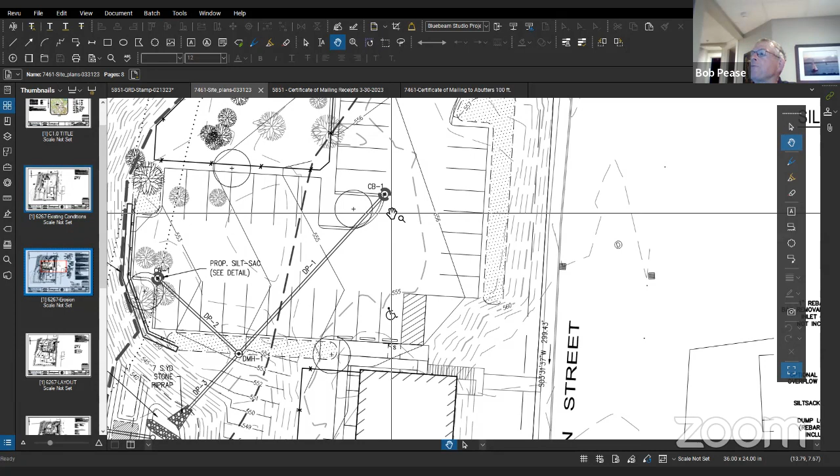Will the silt sack still be there after construction is completed, or is that something for during construction? No, that is during construction only. Great question. Yeah, that's during construction only. I feel a little better, 'cause I can't even imagine the poor people trying to run a school having to worry about these silt sacks. No, just during construction, in this case prior to paving. Once it's paved, there'll be no reason to have those in there anymore. Thank you very much.

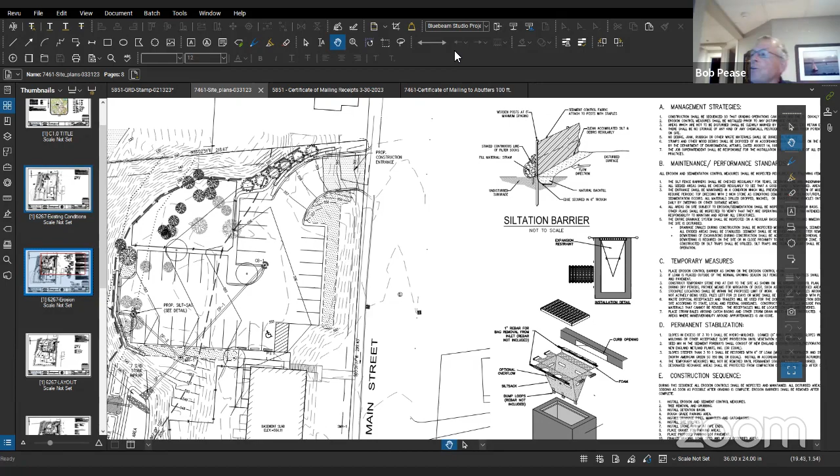If there are no other comments, I'm looking for a motion to continue until May 3rd. So moved. Mike. Looking for a second. Second, Richard. Motion by Mike, second by Richard. Roll call. Rich, aye. Mike, aye. Mary, aye. Richard, aye. And aye for myself, and I won't give you my little spiel about sending a copy of your canceled check to DEP because you've heard it before. Yeah, we'll be following up with them for sure. All right, appreciate it.

Thank you. Thanks, everybody. How do you get all these easy jobs, Greg? Squeezing this in there. Yeah, well, I don't know. I guess I'm lucky. Yeah, I'm impressed how much you got in this space. Oh, thanks, Rich. Appreciate it. Yeah, nice job. Thank you. All right, everybody. Thank you. Night. Enjoy the beach. Will do.

Pursuant to Mass General Law, Chapter 131, Section 40 as amended, and the Town of Lunenburg Wetland Protection and Municipal Bylaws, a public hearing on a request for an amended order of conditions by Brian and Cynthia Ritchie for proposed changes to a previously approved dock at 137 Flynn Road, DEP number 208-1242. And if I recall correctly, last time we said we wanted to see some additional information on the plan. So, Mr. and Mrs. Ritchie. Good evening. Good evening. Yes, Mr. Chair, so we have a new plan from Dillis and Roy.

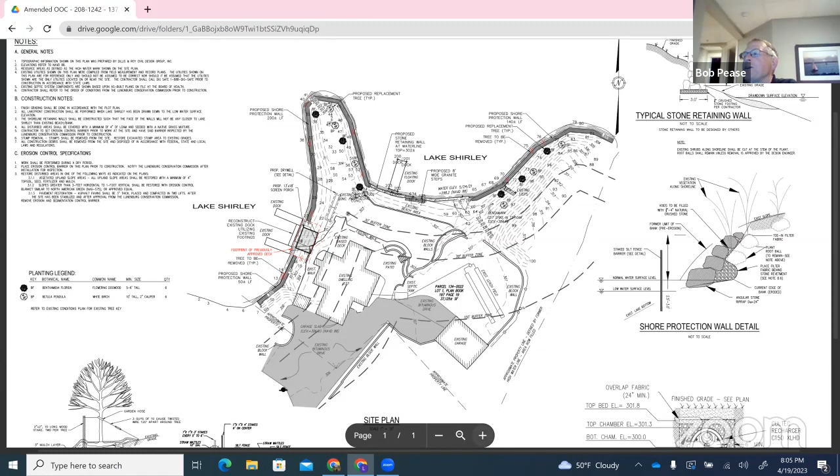Wait, stop. Is that a UConn Husky hat? It is. Ah, see, I have 3 degrees from there. I'm a rabid basketball fan. We have 2 children there. Oh, okay. So your money and your kids go there. Yes. I'm sorry to interrupt.

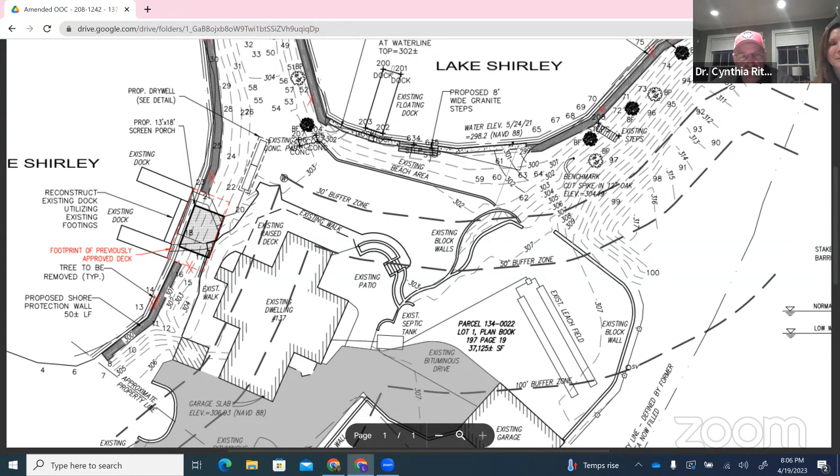So Anna was able to bring up the new plan. In the red is the approved open deck structure that we've currently been approved for. That spans from edge of existing dock to edge of existing dock. And if everybody remembers, it sits on an existing concrete structure out there. We are proposing a smaller 13 by 18 structure, but a screen porch as opposed to an open deck. And the concern last meeting was the drainage off the roof, and we've had Mr. Roy draw in this proposed dry well north of the screen porch.

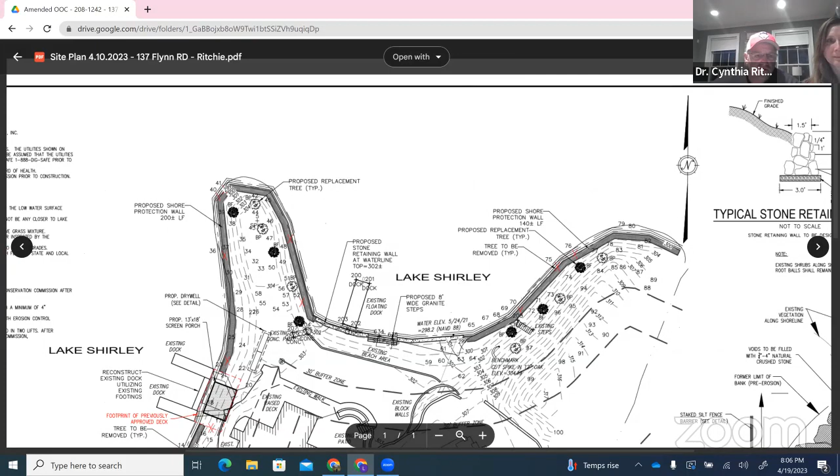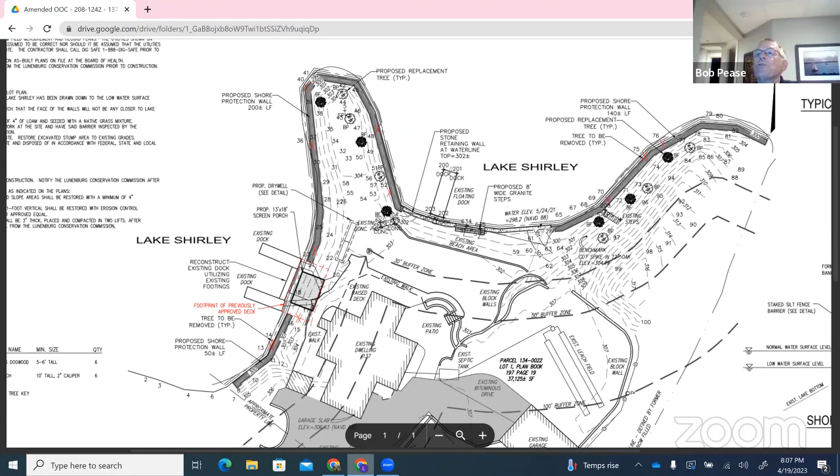Slide right. So we would have the water drain off the roof on the back corner, and it would head into this dry well system. Oh, I see. Proposed. Okay, yep. Thank you. I believe that's what we were looking for. Any comments or questions from commissioners? Any comments or questions from members of the public? If there are no other comments, then I'm looking for a motion. This is an NOI, amended order of conditions. I'm looking for a motion to approve this amended order of conditions.

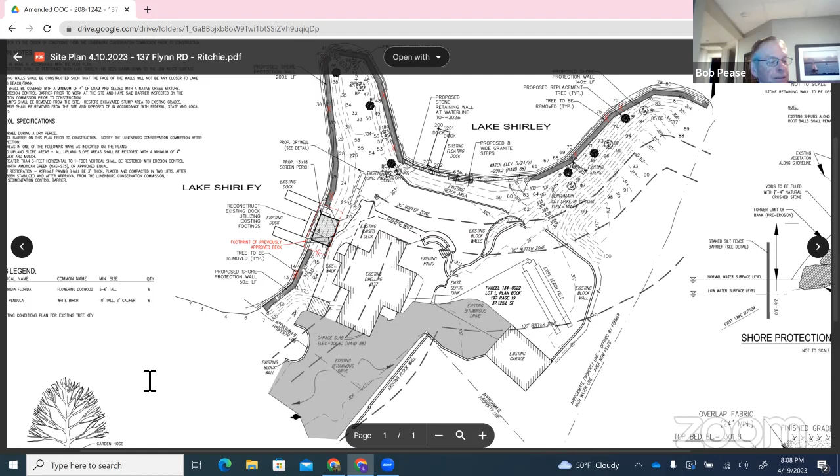So moved. Thank you, Mary. Do we have someone who's willing to second this? Second, Mike. Second by Mike. Any further discussion before we vote? Roll call vote. Rich, aye. Mike, aye. Mary, aye. Richard, aye. And aye for myself. Any questions, Mr. and Mrs. Ritchie? No, just thank you very, very much.

So thank you for your time. Sorry, you had to wait through the whole meeting for that. That's fine. We keep learning a lot. You guys are doing good work. Thank you. All righty. Bye-bye.

New business, update on the timber rights fund. Nothing's really changed in the timber rights fund. I sent an email earlier today, copied everybody. I'm looking for a motion tonight to approve a purchase order of $955 from the Timber Rights Fund to buy more trail markers. Right now, we don't have enough trail markers to mark the existing trails on Table Rock. And Mary Wilson has been working with the Girl Scouts to go out there and mark the trails. And we've run out of green, red, and blue.

And by the way, I have to mention that George French, I don't know if anybody knows George, but he has been working really hard at putting up trail signs all over the place. And when he gets done with the present signs he's working on right now, the only place left in town that doesn't have all the trail signs bought by the grant will be Northwest Town Forest. So that's going great. But anyway, I'm looking for a motion to approve a purchase order to Voss Signs for $955.